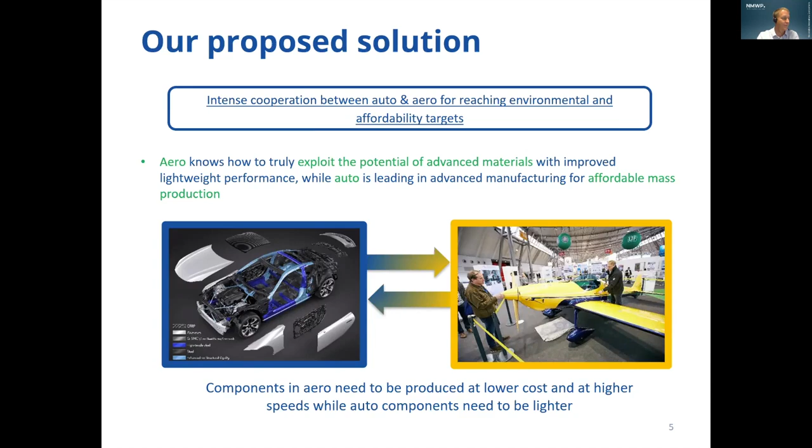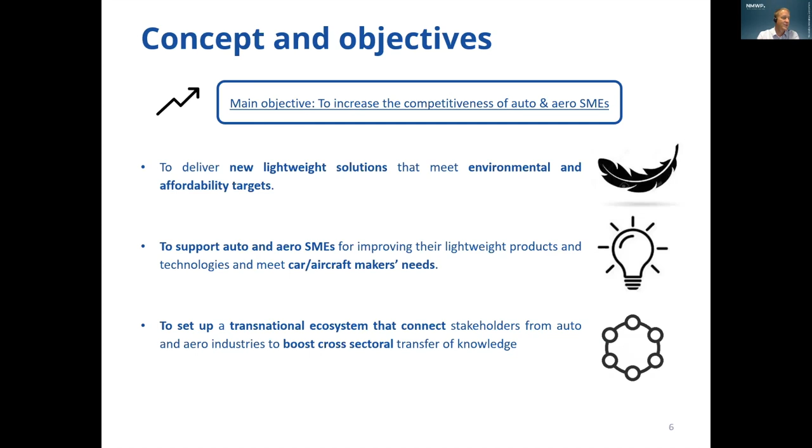Now, how would we like to do this? First of all, we have this challenge-driven competition. So we have international enterprises who provided challenge-driven competitions to us, thematic challenges proposed by end users and large suppliers from automotive and aerospace sectors. And now the small and medium enterprises can apply with an innovative solution.

The next activity is our field labs and trainings. So we provide the possibility to present the solutions to these challenges in a competitive approach. And specialized field labs are set up to support the technical development of the winning solutions. So there will be a jury which will award the solutions provided.

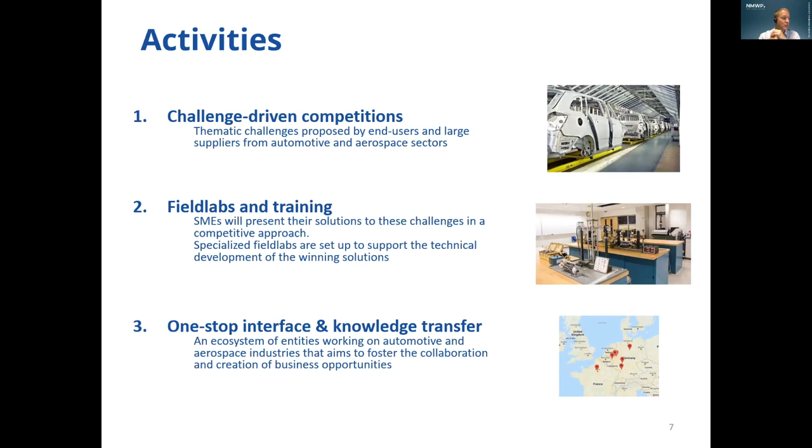And then next, we will have a one-stop interface and knowledge transfer, which will be done online in a tool provided by us, NMWP. So I think this is RIGHTWEIGHT in a nutshell. So we have two industries very dependent on lightweight, which should benefit from each other from the solutions they developed.

And I think before we come to the challenges, we would like to introduce the KIT on the one hand and NMWP.NRW on the other hand. So now I would like to hand over to the presentation of Markus Bardinger, who will present the KIT and give a short overview about the state of the art of lightweight constructions.

Is that right? I think so. Yes, it is. Thank you, Henrik. Okay, perfect.

Very good. So yes, I'm also a part of the RIGHTWEIGHT consortium. I also initiated parts of the project back when we first met in Brussels almost 2 years ago, I think. And now I want to start with a short presentation on the KIT, especially on the IPEK. So this is my institute where I'm working.

So my name is Bardinger, as Henrik already introduced me, and I'm chief engineer here at the IPEK, and I'm responsible for the CAE optimization group as well as for the development methods and management group. So I'm trying to share my screen, should be possible, I think.

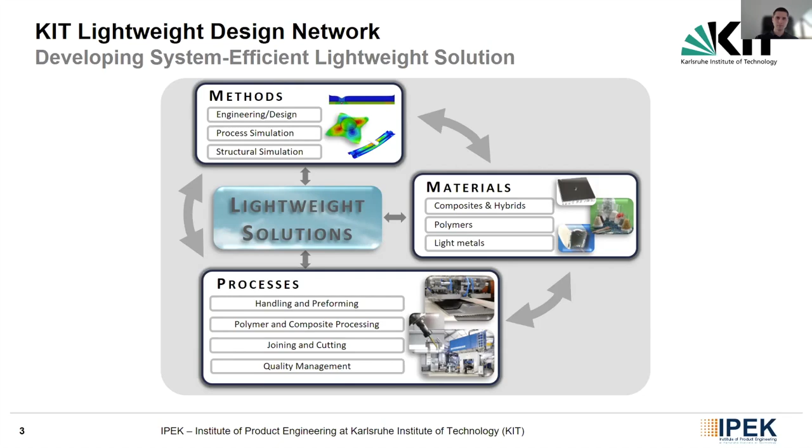So, but why is lightweight design still today, or especially today, that important? I brought some numbers here. I updated them this morning again, looking into the numbers from 2020.

2021 is not available yet, but I think it's pretty impressive that over the last 60 years, we doubled the mass of our vehicles, and we also increased the power of our vehicles by a factor of 4.

I think looking at the higher mass shows us that it is necessary to be more efficient, even in the future, and that we have to find new lightweight design solutions, especially for battery-driven vehicles like BEVs or plug-in hybrid vehicles.

And we need to find solutions for the higher masses of our batteries that we have to carry around with us in our vehicles today.

So I think an important part of this development is also caused by the fact that we need to include batteries in our vehicles today.

So those are, of course, numbers from the automotive industry, but this also applies in many cases to the aeronautic industries. Of course, today we are thinking about having batteries in airplanes as well.

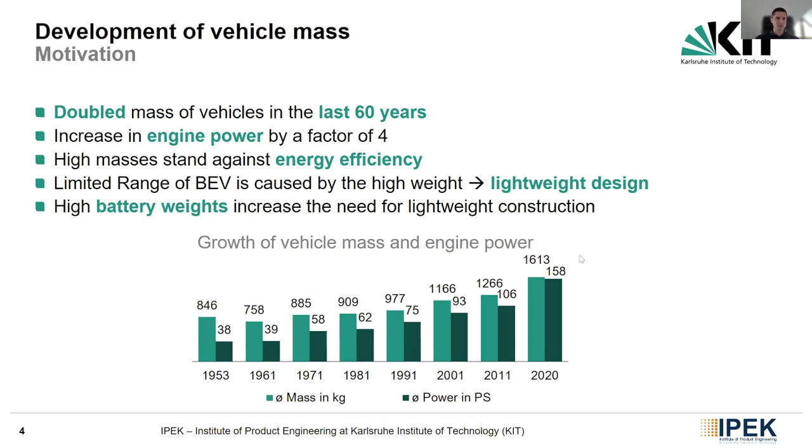We need to find solutions to minimize the weight of our aircraft as well, and this, I think, is the same reason for lightweight design approaches that we can see all over.

So here's just one example of the projects we worked on in the past. We need new structural materials, as have been included in battery electric vehicles like the i8 from BMW, but also the i3, for example.

But this is also only possible if you include new construction and design methods, so that you have engineers who are able to apply those new materials to their specific use cases.

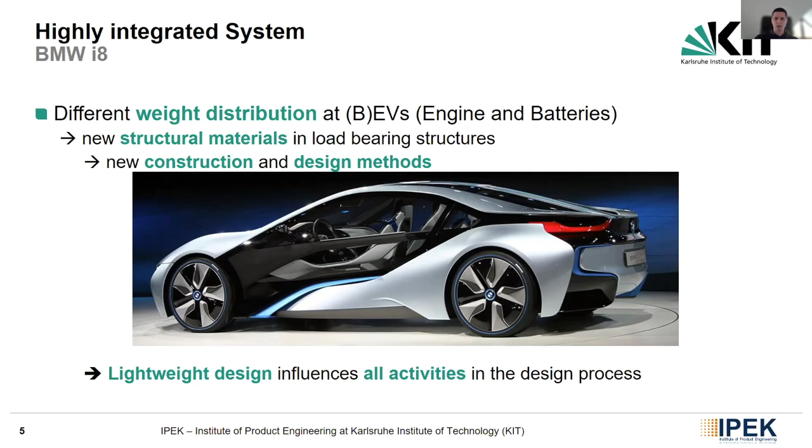Another example we worked on, which I want to use to emphasize the different lightweight strategies that are well known out there to develop new vehicle generations.

So I'm talking about product generations in my talk, my short presentation. That means we are developing our products not from scratch, not based on a blank sheet of paper.

So we always start development based on a reference, always based on previous product generations, based on predecessor systems.

And of course, when we have the challenge to reduce the vehicle weight, we can change material. We can, of course, change the connections between our different components and parts. We also can optimize the shape, the embodiment of different components.

For example, to optimize via topology optimization.

We can also go into more complicated ideas and conceptual parts, like integrating functions to reduce the amount of components. Or, if it's possible, we can also think about the requirements - is it possible to reduce comfort?

But of course, nowadays, most product development processes aim for more comfort and more safety. So reducing requirements normally isn't possible within the projects we see.

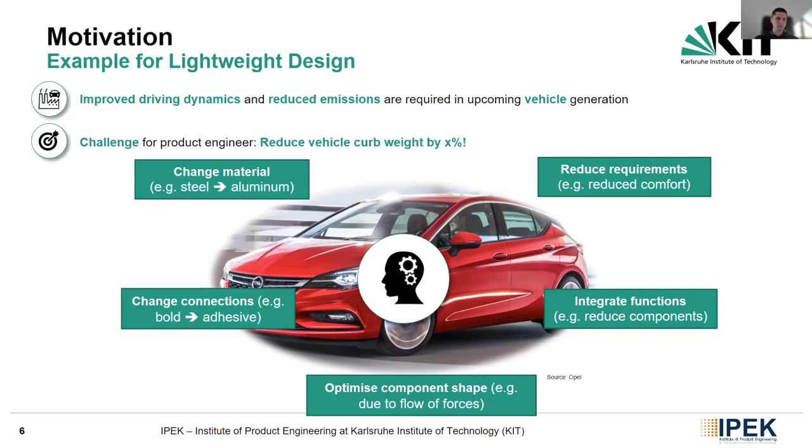So here are the different lightweight design strategies. I want to link this with the different lightweight strategies: material, manufacturing, form, system, and conditional lightweight design strategy, which are more or less commonly known through literature. There are some other approaches, but most of us will agree those are the possibilities we have in lightweight design.

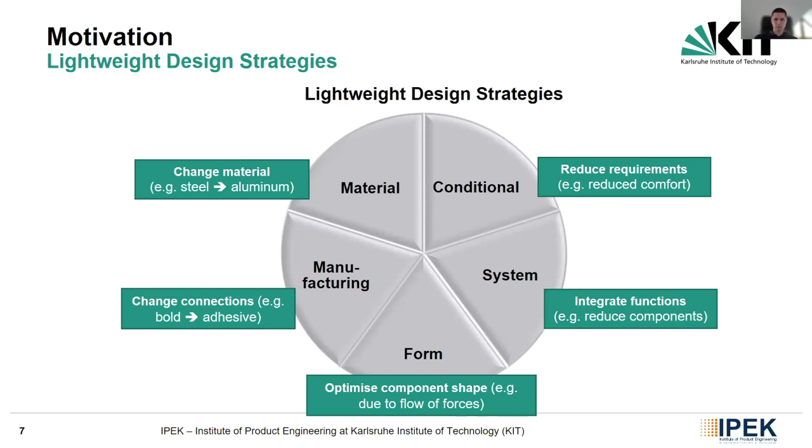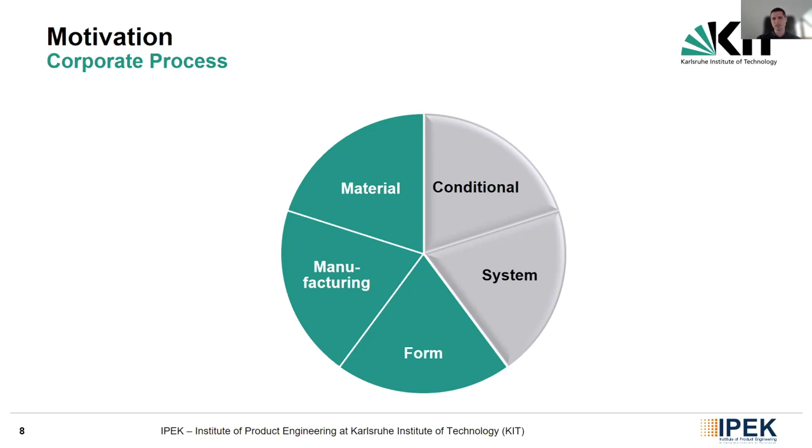So here at IPEK, we focus on three lightweight design strategies: material, manufacturing, and form lightweight design. This is also how many corporates work, structured in different subsystems, and this is a typical task we fulfill here at IPEK, at KIT. We try to focus on a specific subsystem, for example a control arm in a suspension of a vehicle or a specific part of the chassis, and then we try to get as much out of it as possible.

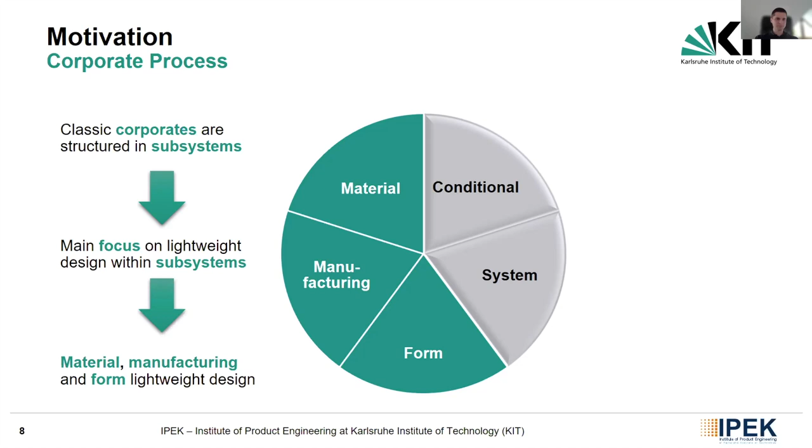So we are trying to find the right material for the function, and we try to find the right design for it. But this, of course, focuses only on material, manufacturing, and form lightweight design. So what are specific approaches we are using?

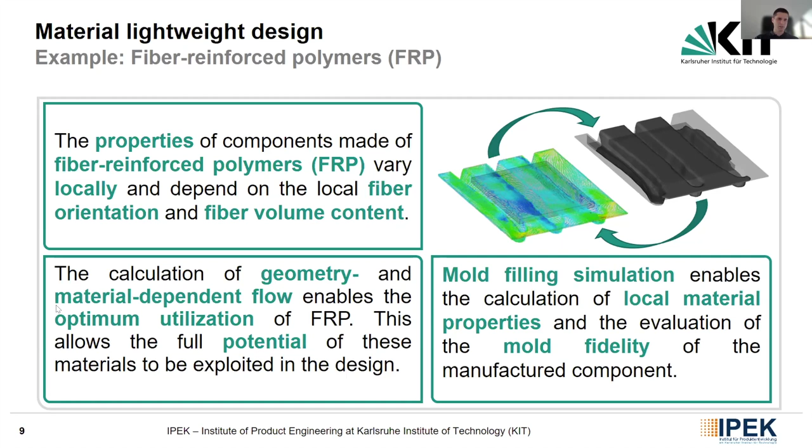We are using long fibers, for example carbon fibers or glass fibers here, and we are able to predict the material behavior within the optimization process. This allows us to optimally use this material behavior for our dedicated function and to transfer our forces through our part later.

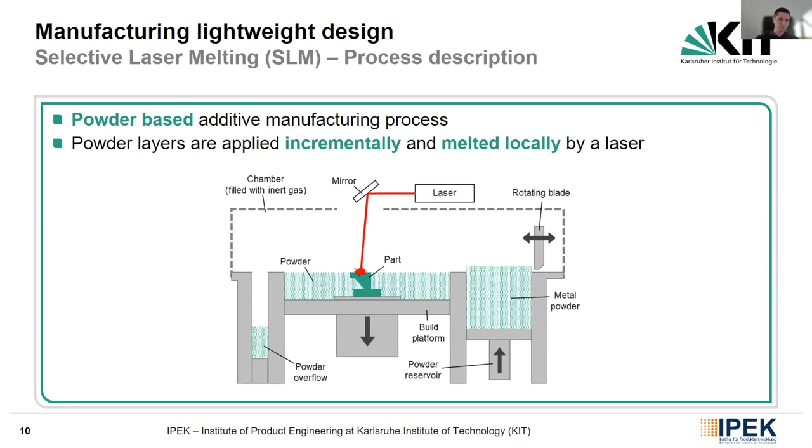Another example of how we can include different manufacturing processes into our design process is shown for the selective laser melting process. I think most of you know the 3D printing process shown here; I just brought it to give you a short impulse. Of course, this material is printed within layers, and those layers later have an influence on the material behavior we can see.

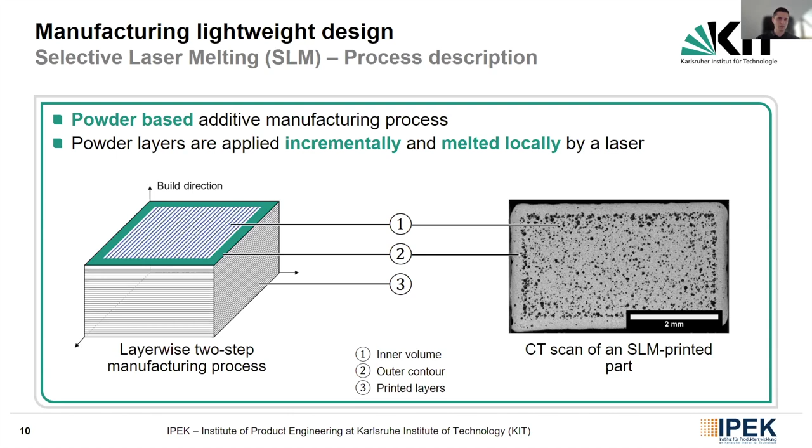It's a CT scan of an SLM printed part here, and there we decided to have three different zones: the inner volume, the outer contour, and the different printed layers, shown on the left-hand side. We measure the material behavior here together with a partner institute at KIT. Then we include this material behavior, which is laid out over our different structural parts, within a topology optimization. This is shown here.

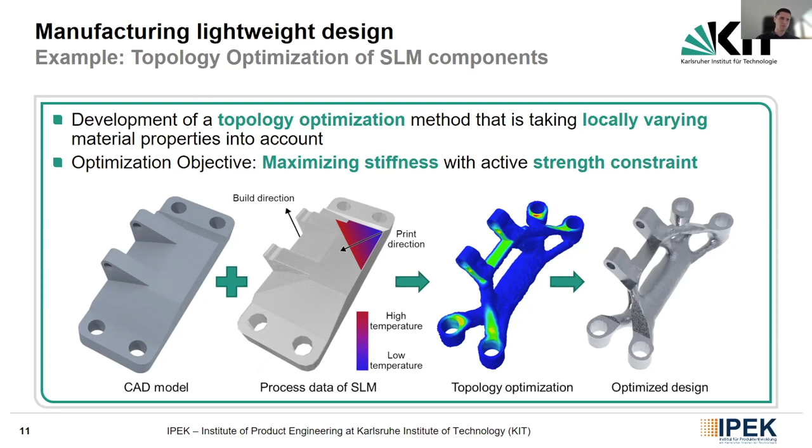Another approach we're following here at IPEK is the optimization of thin-walled structures. We introduce beads to the structures to increase the stiffness. And there, if you think about using fiber reinforced polymers, or even just steel, there's an influence from the manufacturing process, and this can also be included into the bead optimization process, which is currently being done within, I think, two or three projects here at IPEK.

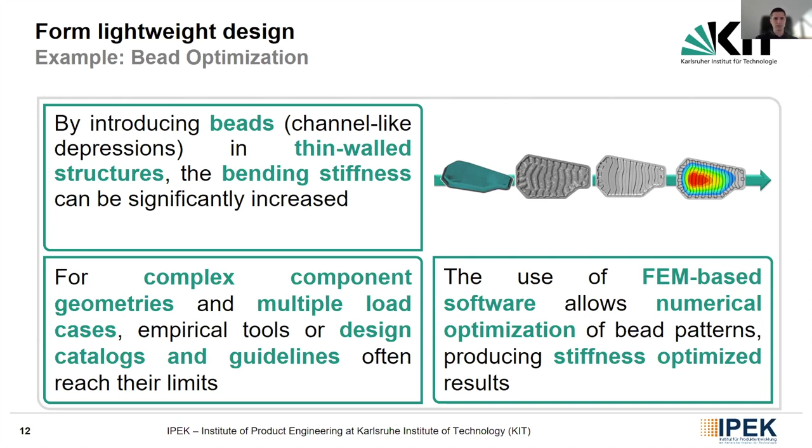As I mentioned, those 3 different lightweight design strategies are necessary and important, but there's also more, I think, and this more is to combine it on a cross subsystem approach so that we can include all the lightweight potential within projects, which overcomes those boundaries I mentioned before, so that we can find the overall system optimum and not just local optima as in the approaches shown before. This is called concept lightweight design here at the IPEK.

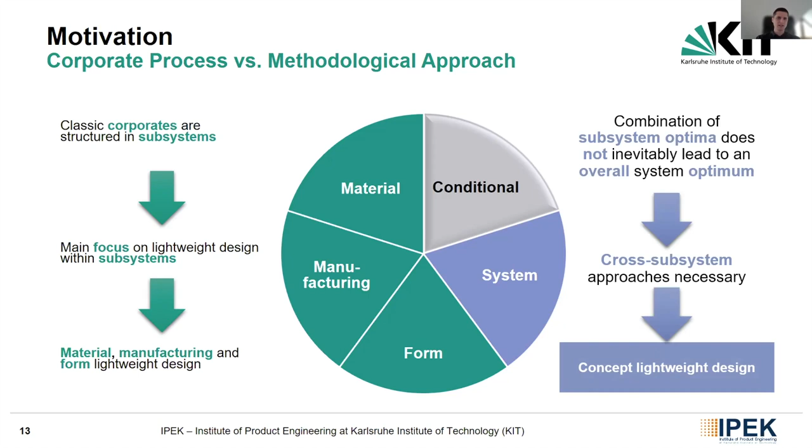What you need to understand, I think, is we start with a product generation we already have. Then we analyze the different functions of this product generation, and also we analyze our efforts. So we include the mass, of course, in lightweight design of our product, but we are also analyzing its costs and its CO2 emissions within those projects. This enables us to calculate the effort of one function, and then we can decide where lightweight design is necessary and useful, and where it's also useful from an environmental point of view. Then we go through this complete process and end with a new product generation. That's just in short what we do here.

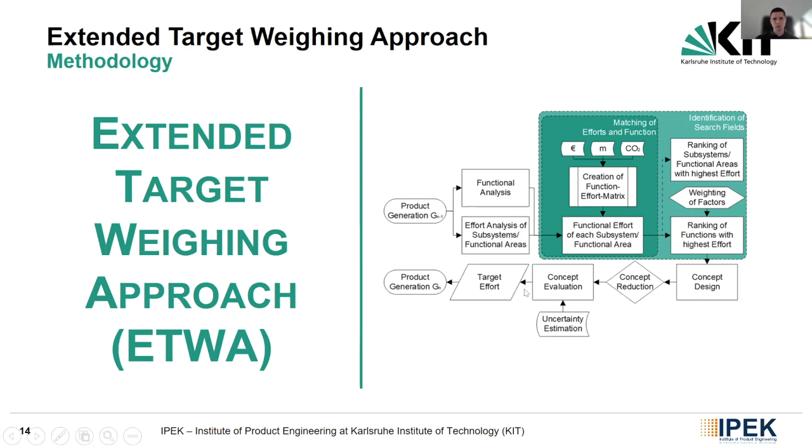I brought 2 examples. One of those examples is the high voltage battery we optimized a couple of years ago. There we had to reduce the weight of this battery by 20%. Of course, we did it not just alone at our institute, we worked together in a bigger consortium. But what you can see is that already in a really early phase of the product development process, here in the concept phase, we can compare different concept solutions and decide, based on weight and costs in this example, which is the best solution in the end.

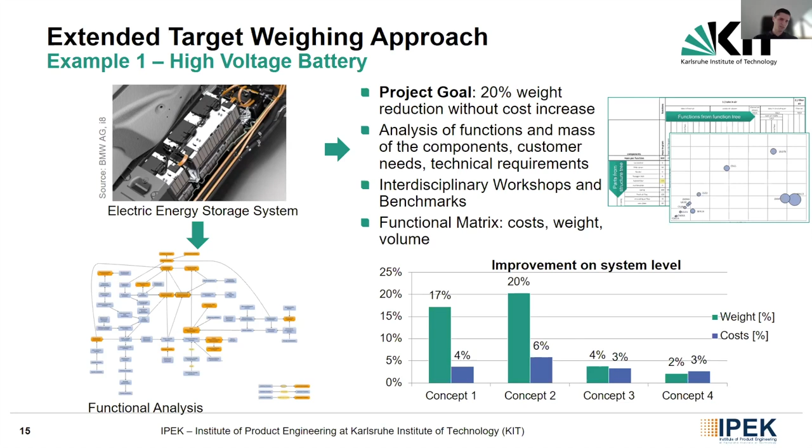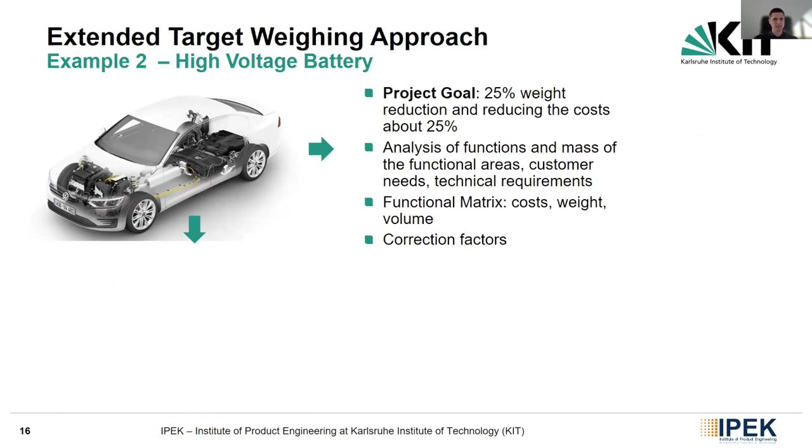The same had been done here for this high voltage battery, so it's a different car manufacturer, as you had seen before. There we had been even more ambitious at this time, so we tried to reduce it by 25% in this project. This has been done completely by IPEK. I think around 6 or 7 years ago, this was one of my earliest projects here at KIT.

And here we had also a part of a battery, just the housing. There we developed an approach to analyze different functional areas with this method. We developed different correction factors, and also here we came up with different possible solutions. So we started first with just conceptual drawings made by hand, then had different solutions more detailed in CAD, and could decide what is possible towards the mass we need to reduce here.

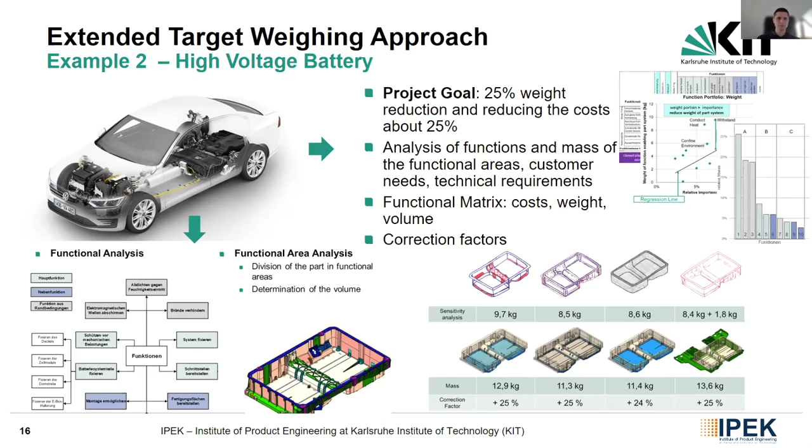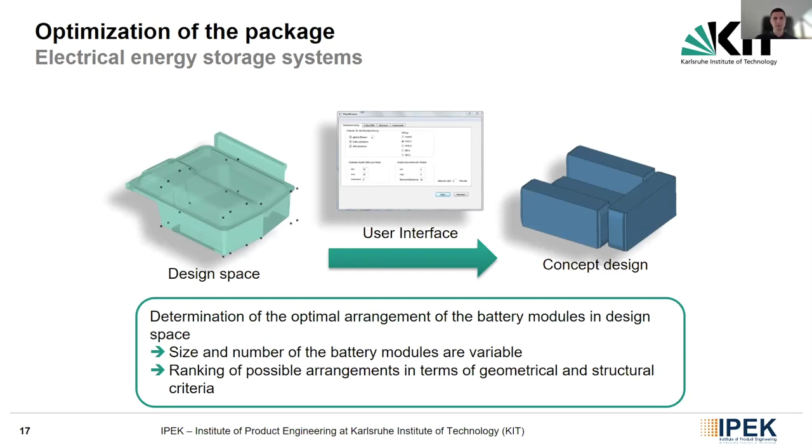So then we had further projects in electrical energy storage systems where we tried to find new solutions based on combining different methods, like for example topology optimization together with a packaging algorithm that had been developed. We started here with the initial design phase and developed a first concept design, and there we could have an easy ranking of different concept solutions, so where to apply how many cells, for example, in this energy storage system. We also could automatically evaluate how the later mass and the structural behavior of this component will be.

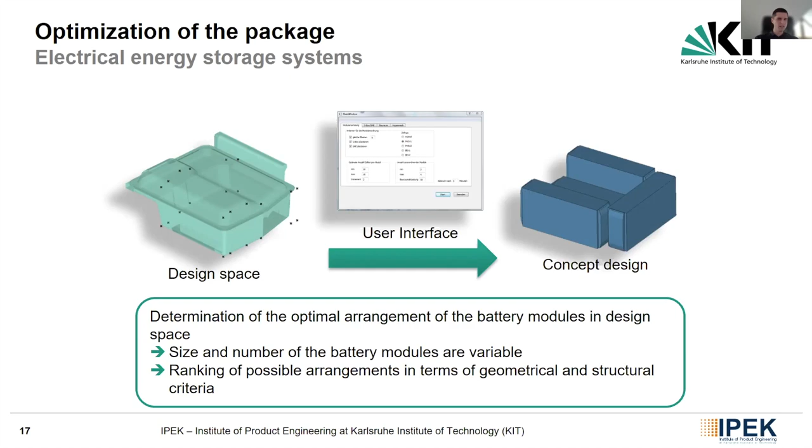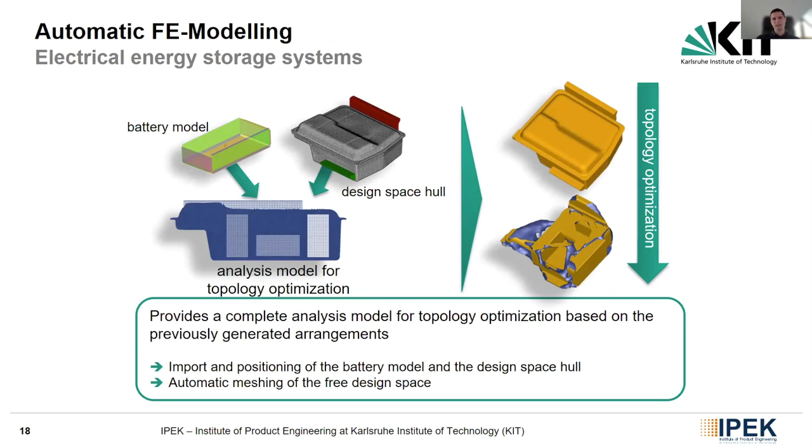So this had been done, as you can see here, by topology optimization, which had been completely optimized. We included our battery model, our design space, into a complete analysis model. And then we had in the end different suggestions of our structure and could compare which is in aspect of lightweight design more suitable than others. Here are some more exemplary solutions to that.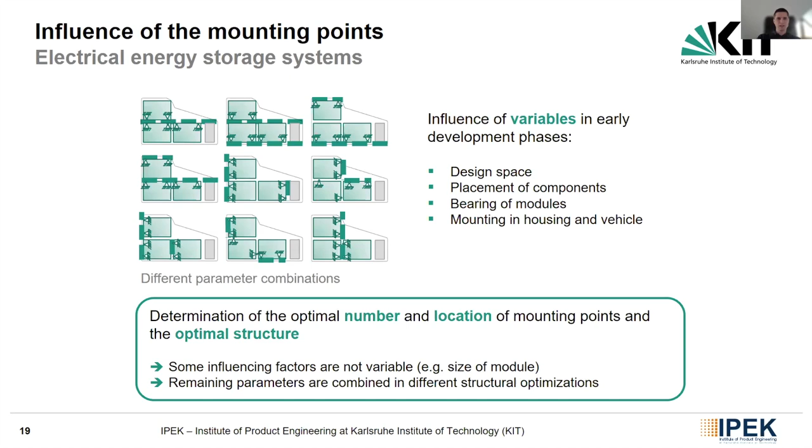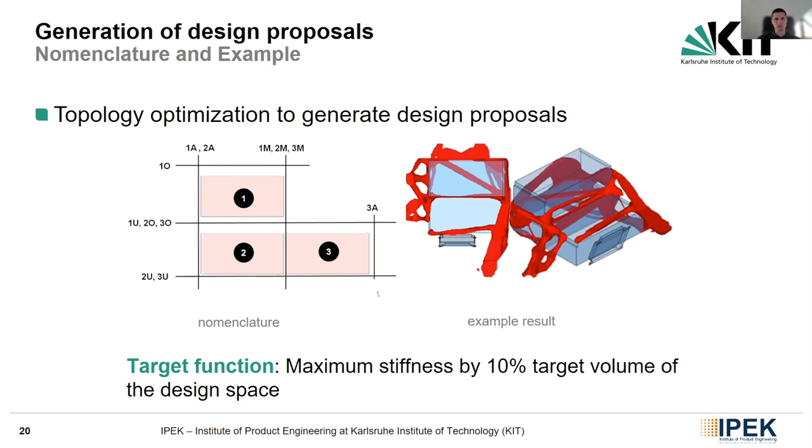To not exceed my time too much, I will leave it here and just motivate for using the methodologies. You know, for example, to have a design approach, then go into CAD, then go into calculations or FEM models, and try to find your best solution. It's not always the best process. Sometimes it makes sense to introduce methods and tools like topology optimization to really early parts in the product development process and try to find best concepts and compare different concepts as shown here.

So to conclude my short introduction and how we see lightweight design, I want to motivate that it's important to think in product generations. So you have to use the information you have from predecessor systems. You have to find a way to manage your knowledge in a sufficient way to make your knowledge applicable to new solutions.

This can be done by systematic views, by integrating material, computational methods, and modern processes. This leads in the end to the chance, at least, to exploit the full existing lightweight potential by a systematic approach, a system-oriented lightweight design approach. So thank you very much.

I hope I didn't exceed my time too much, and I'm looking forward to the really interesting challenges, and first of all to the introduction of the NMWP, I think by you, Matthias, right?

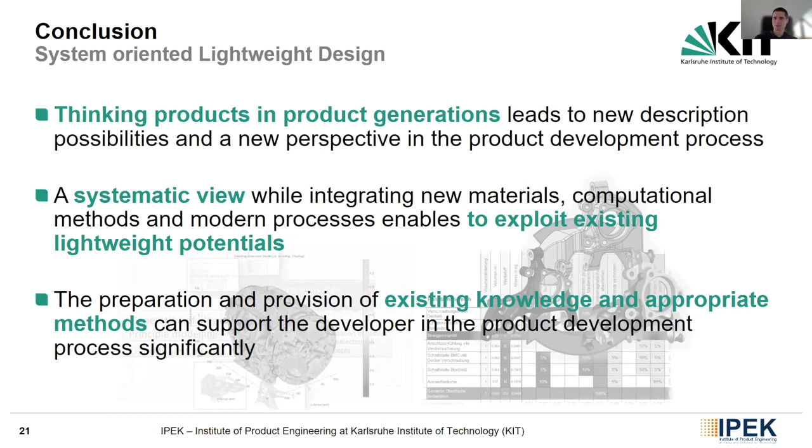No, it's by me. So thank you very much. Everything's fine. Thank you very much for your presentation.

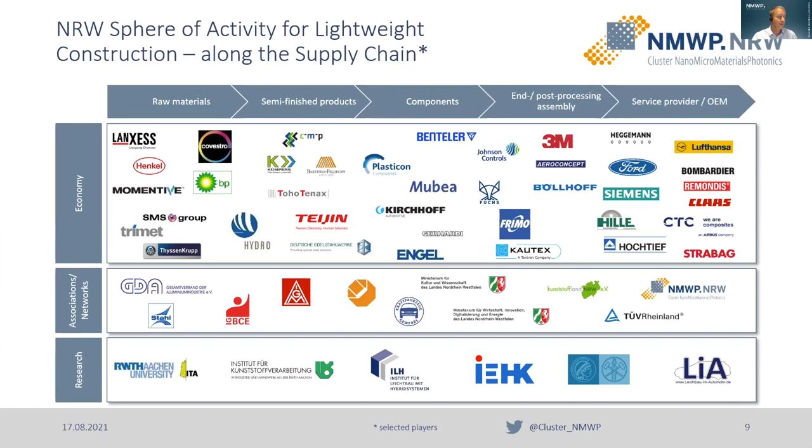There are several networks, and we have very strong expertise in research in North Rhine-Westphalia. RWTH Aachen, I think it's one of the bigger universities. We have also smaller universities and institutes, a lot of Fraunhofers which are involved in lightweight construction.

So how can we be of service for you? You can benefit from our services. We have strategic consulting and support for setting up technology-driven corporations and businesses with partners in North Rhine-Westphalia. We have a strong network, so we can give advice on this.

Also, we have guidance. We have an overview of North Rhine-Westphalia's economic and research landscape, so we can help you with this as well. Advice on specific NMWP related topics and possibility for grants also. And we have also a certain link to the policy community.

So this is NMWP in a nutshell. And Markus said in his presentation, lightweight influences all sectors of engineering and design. I think I can conclude with the key enabling technologies: nano, micro, materials, photonics, and also quantum technologies, which have a strong influence on every industry and also on every part of lightweight constructions. And with this, I would like to end, because lightweight has already been presented.

And then I would go back to the last presentation, and then we can go on with the challenges we have. So give me one second, please. Start the presentation. Okay, so now I think we can go on. Matthias, do you want to start with the challenges we would introduce, or who wants to start? Yes, I would go through the first set and then hand over to our partners. Okay, so perfect, then the floor is yours.

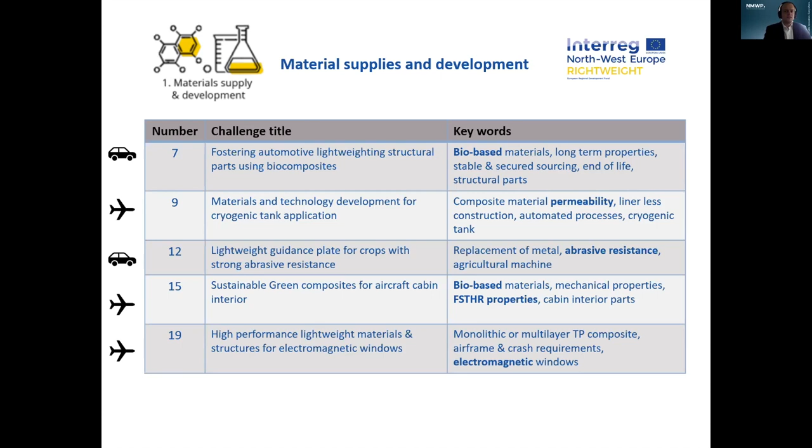Yes, exactly, that would be challenge number 9, which is cryogenic material applications. As we know, more and more alternative fuel usage is promoted in aerospace, and it's already used in space applications. There's a need for new materials for cryogenic tanks. The scope of the challenge is that there will be a resin system necessary with matching thermoset, thermoplastics, and definitely high temperature and chemical stability. Here on the right, maybe some recognize it — this bluish color is liquid oxygen. That's pretty cold and also pretty reactive, so it has some high obstacles that need to be overcome for the material.

The current production technologies are filament winding, automated fiber placement, automatic tape laying, or laser-assisted tape laying. All of them have some benefits and some drawbacks. For example, the two blocks shown in the middle: this resin either has high permeability, which is not so beneficial for storing the slowly evaporating fuel material inside, while low permeability is much better, also for cryogenic applications, because the temperature change will decrease if it's low permeability. So the challenge objective is finding the best compromise between cost saving, mass saving, and performance — it should be lightweight, but it needs to really work as a good cryogenic tank material. It would be nice to develop a breakthrough technology for cryogenic tank applications. The scope of this challenge currently would be just the demonstration of material and technology maturity on a small scale prototype, so that in later steps, large scale application can be done.

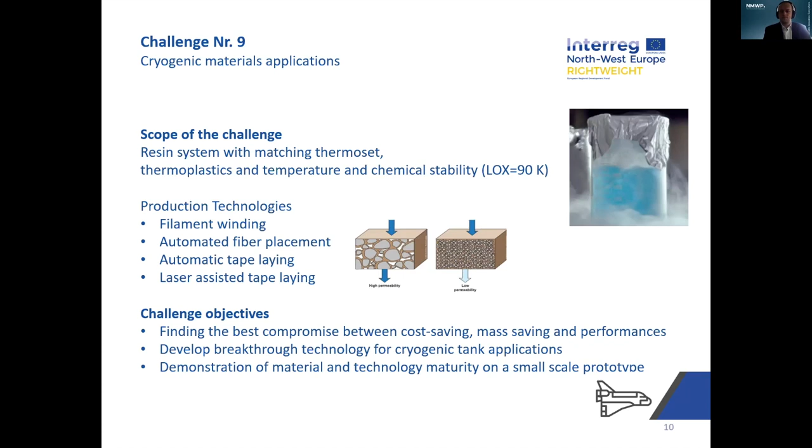Then the next set of challenge topics — next slide please — is characterization and modeling. As we saw in the IPEK presentation already, modeling before building the part is very important, and can always improve the lightweight properties of the material and the component.

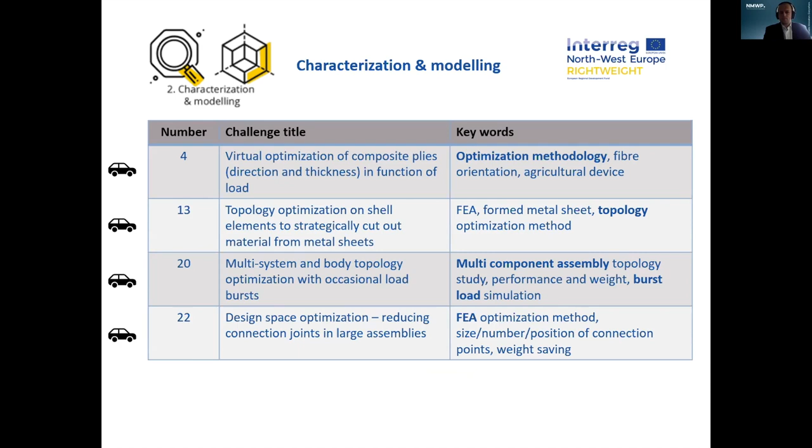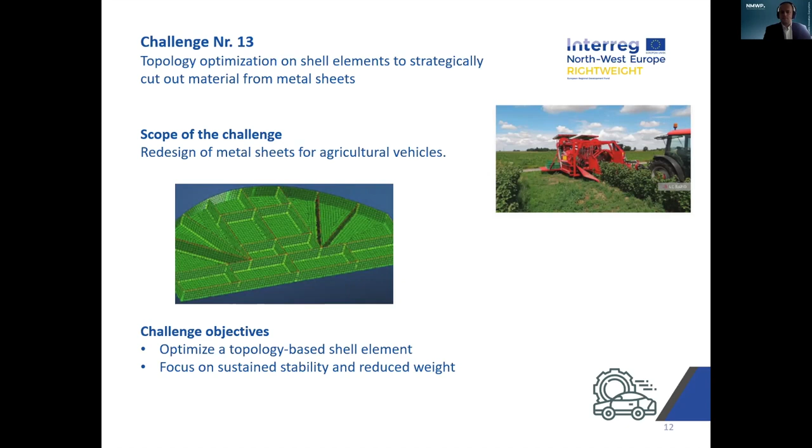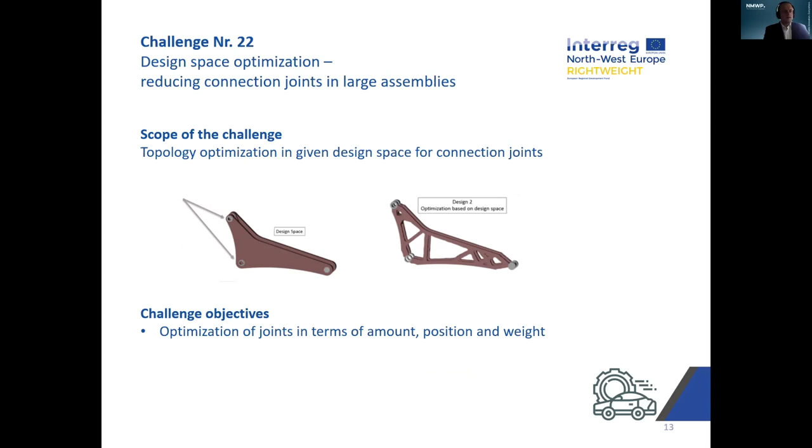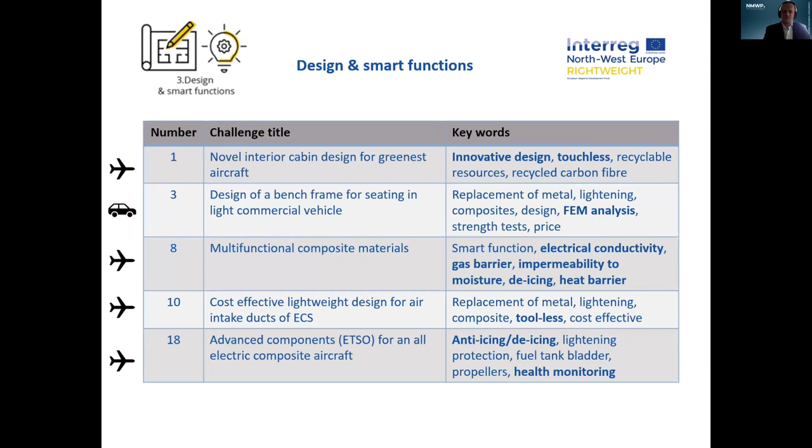Yes, the third topic of challenges is about design and smart functions. It's more and more common that the material is not just a simple material, but has more elevated functions. On the next slide, as people who are familiar with aerospace know, there is the European Technical Standard Order, ETSO, so components that will be developed need to be certified.

And here the target is to develop an all-electric composite aircraft, where, in open discussion with the challenge owner, these advanced components shall be designed and cost-effective solutions shall be proposed. So there are different possible objectives here. Not all will be done in one challenge, but it's open to discussion.

If you apply, you can get in contact with the challenge owner and do something like an effective aircraft design thanks to advanced composites. You can do some system integration, develop a health monitoring system for the composite and the overall system. And finally, that should lead to the transition of an all-electric aircraft that is newly designed and highly lightweight.

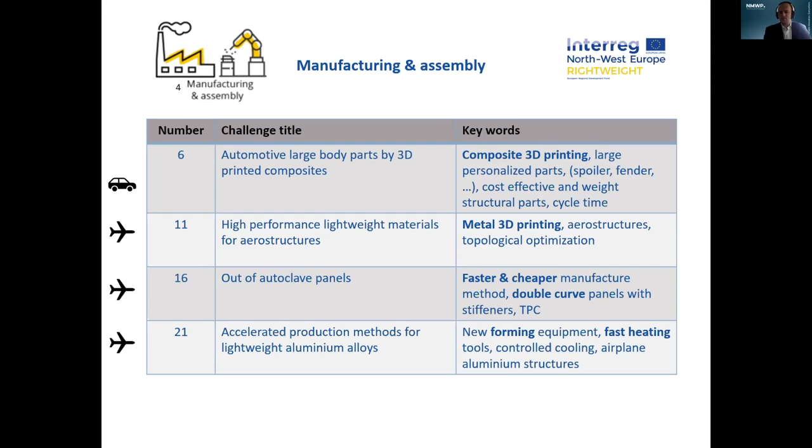On the next slide, yes, we are on topic number 4, manufacturing and assembly. As we had before, automotive has high-volume production, but aerospace is sometimes slower or more special in assembly and manufacturing. So they should learn from each other. And that's what we have on the next slide, which is challenge number 11, high performance lightweight materials for aerostructures.

So there are materials and building components that are already present or in use, but topology optimization is necessary. It is highly desired that interchangeability with existing parts is given. And the idea would be to either use newer composite materials instead of the currently used steel parts, and/or combine them with 3D metallic printing to allow even better topologies. So this is basically also the challenge objective: latest 3D printed metallic structures and a cooperation to finalize a technology partnership to then develop a sample or prototype.

The next challenge is out-of-autoclave panels. Autoclave is a technique that takes quite a lot of time, but gives very nice results. Nowadays, many thermoplastic composites are manufactured in autoclave to consolidate the properties. But autoclave takes a lot of time. So there is the state-of-the-art data here, and if somebody has a nice idea, the challenge objectives would be to find an affordable production method with a shorter cycle time, determine the manufacturing costs, and then produce one demonstrator that can be thoroughly tested afterwards.

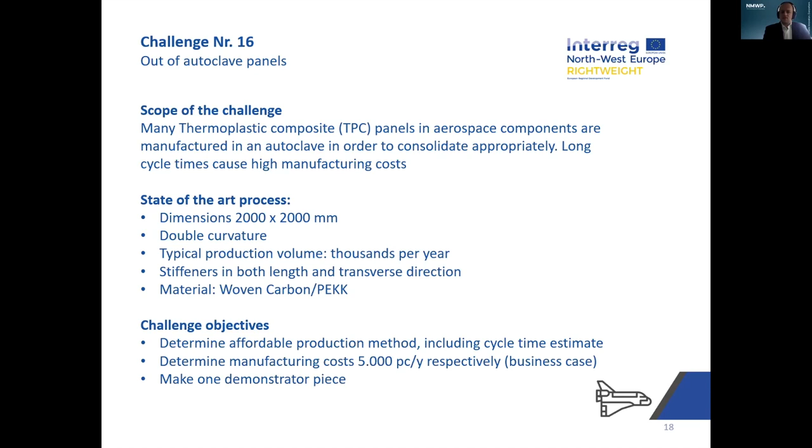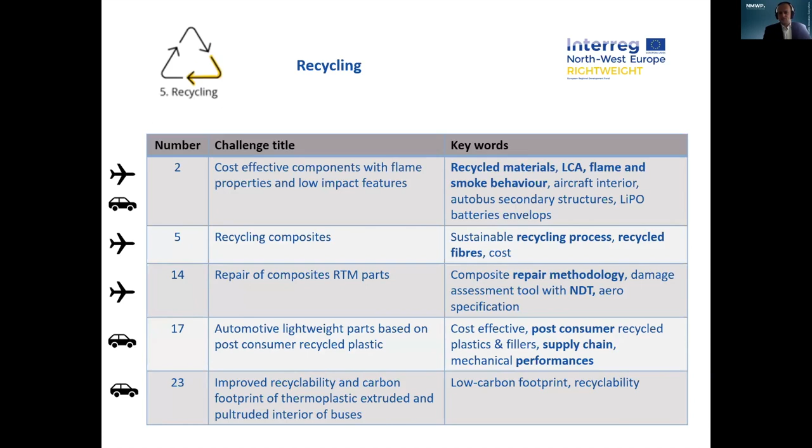The fifth topic is recycling, as it's not just about producing something lightweight from an unrecyclable or not so environmentally friendly material. Recycling becomes ever more important. And here we have on the next slide the repair of composite RTM parts. Most often a composite material, if damaged, has to be replaced completely because of the nature of the composite. But this is very costly and not cost efficient.

As everybody can imagine, there's the danger of damage through small objects, especially in aerospace. And it would be nice to find an in-field solution without the necessity to disassemble the plane, for example. This would extend the life cycle of the repaired part, but also of the whole system.

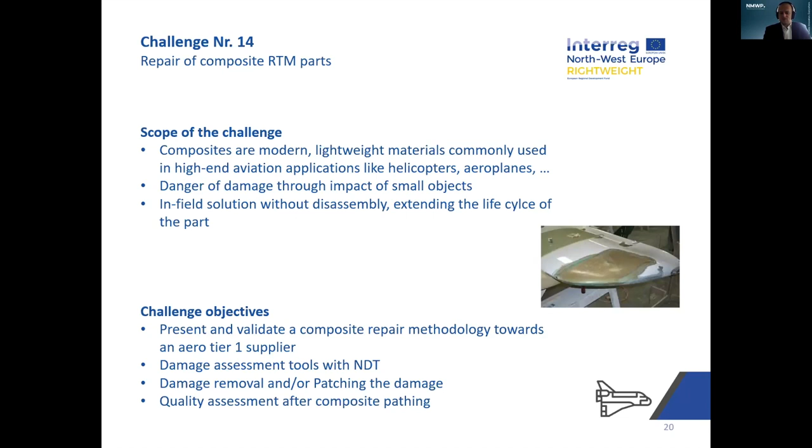Challenge applicants should present and validate a composite repair methodology towards an aero Tier 1 supplier. It would be necessary to present a damage assessment tool with non-destructive technologies, a damage removal or patching of damaged composite materials, and a methodology for quality assessment of the composite part.

Okay, yes, and I came here this morning by bus, so I'm pretty familiar with this one.

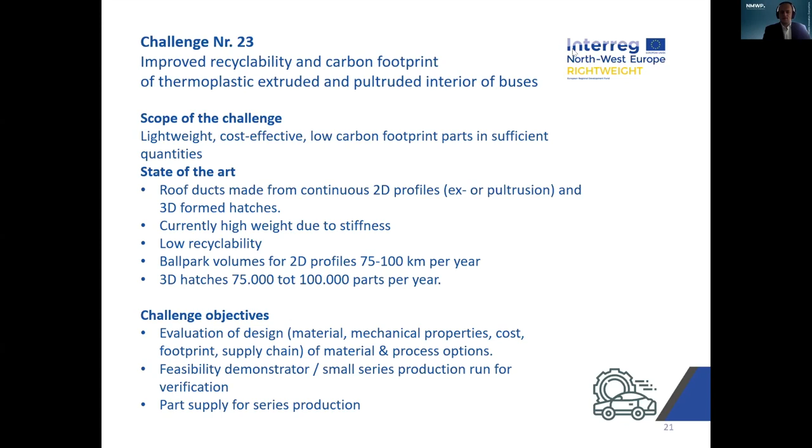Okay, so we will proceed with the next challenges. So we will not present it based on our different slides. We will start by also introducing to you our homepage of the RIGHTWEIGHT project. So this is the central site. You already had seen that there are different cross-cutting areas, which had been also introduced already by Matthias in his presentation. And what we are now going through are the different challenges here. So the cross-cutting areas will also be highlighted in the different challenges.

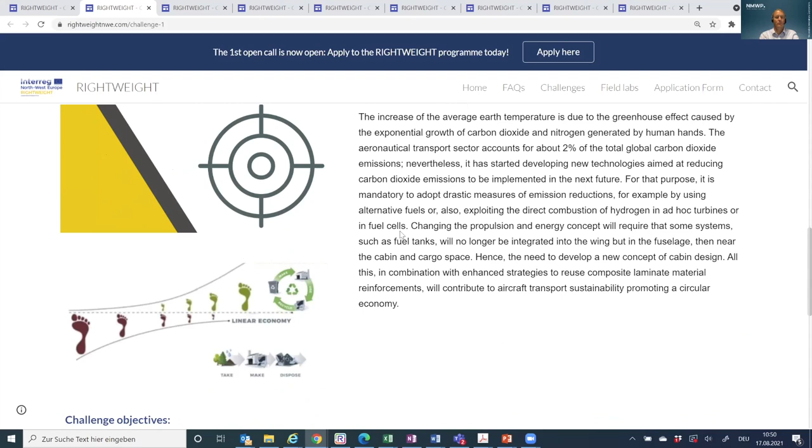So here is some more information about the scope. As I mentioned before, the challenge giver wants to go into a circular and green economy by also reducing the CO2 footprint of the aircraft and the aircraft design. So again, the challenge objectives here are to extend the usage of recyclable material, so that in the end parts are 70 up to 100% recyclable and made out of recyclable material. The fuel consumption within the overall weight reduction is between 8 and 12%, which should be decreased. And of course, the RC costs should be reduced by at least 5%.

Okay, that's it about challenge number 1. Then we go to challenge 2, which will be presented by my colleague, Patrick Haberkamp. Thank you for the introduction.

Yes, so the second challenge is on the topic of cost-effective components for aero and auto transportation, but with the small change that we need also the flame properties and low impact features. So as often used in today's aircraft or automotive sectors, also here the use of composite and polymeric materials is the central part of this challenge.

So additionally, we need to take into account the process reliability and also cost effectiveness, as well as the environmental aspect of the materials. Since in this challenge, the challenge owner likes to develop aircraft interior components as well as autobus secondary components, we also need to fulfill the requirements for structure, for the flame resistance, which is especially for aircraft interiors very important, as well as smoke behavior. We need to find new solutions for materials that can be applied here.

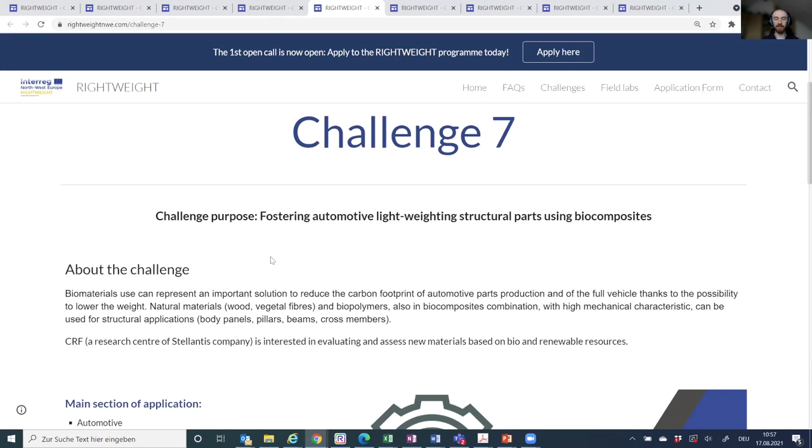And here the idea is to develop new material combinations, and the scope here is especially the development of this material and not the parts. So the scope is the use of biomaterials for the production of car parts that also need to be secure and stable. So we need to have materials that can be available in a large amount, since we still need to produce large amounts of cars.

The long-term properties of these components also need to be comparable to durable parts, for example, steel components, because it would not be really beneficial if we had components that need to be replaced after every year. So the long-term properties also need to be reliable.

And the last aspect is the guaranteed recyclability at the end of the life of the vehicle. So the challenge objective is the development of cost-effective biocomposites to reach the target of green content in automobiles up to 50%. The material also needs to be available in the supply chain, not just a rare component, and we need materials that fulfill the mechanical performances necessary in today's cars.

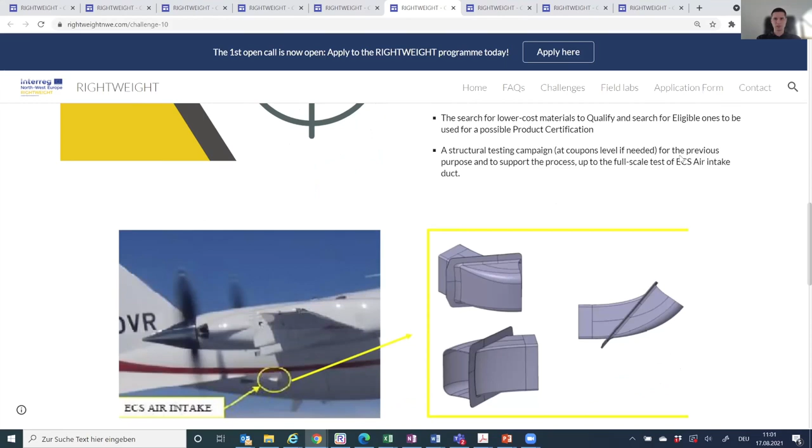So what is the scope? Processes that can be used for parts with complex shapes, as monolithic as possible. Failure is of course a big issue in this field of application. Then the search for lower cost material to qualify, and the search for eligible ones to be used for a possible product certification. And the structural testing campaign should also be provided when applying to this challenge.

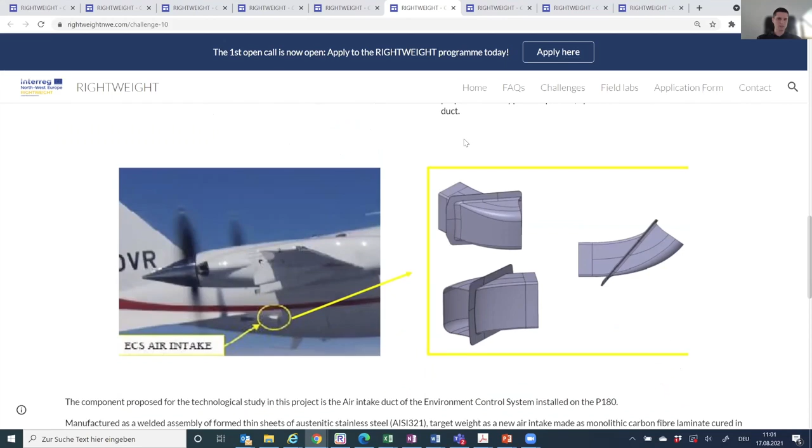So again, the challenge objective is to realize the demonstrator in alternative material and process for this air intake duct for the ECS, based on the reference shown before in this challenge. The solution should come up with a weight reduction of 50 to 60%, while reducing cost by 10 to 15%, and including a method to qualify a material and process to be able to apply it to similar items. Furthermore, you should be able to come up with a supply chain able to supply this new part for the aeronautical branch.

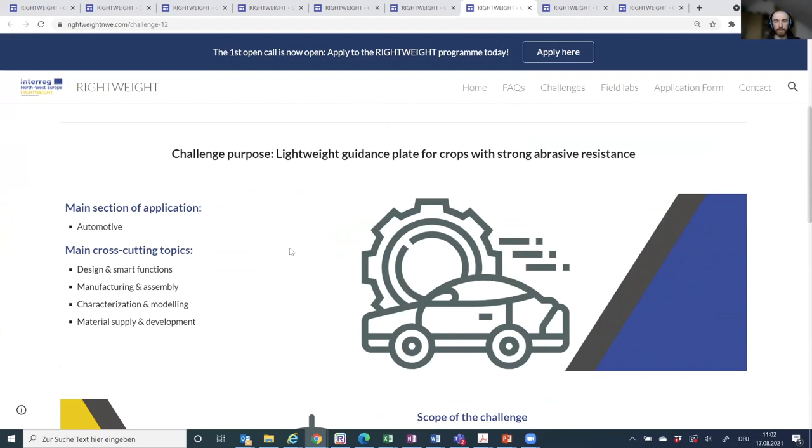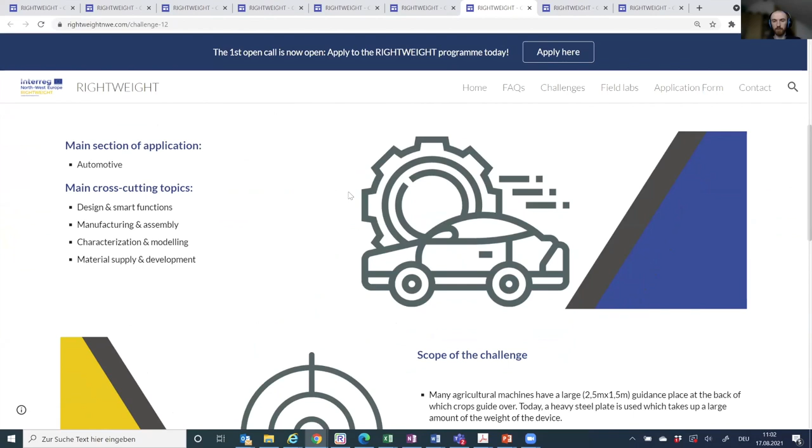Challenge number 12 is quite a specific challenge. It is on the guidance plate of agricultural machines, commonly used with dimensions of about 2.5 meters to 1.5 meters, used to guide crops over. And today, this plate is usually made out of steel, so it takes a large amount of weight of the device.

So the challenge objective here is to identify a lightweight material to decrease the weight of the component as well as the system itself in total. The clue of this challenge is that we have a special requirement since this plate is under an abrasive load from the crops gliding over it, so we need special requirements for the materials. And this is the scope of challenge number 12.

Okay, thank you, Patrick. So challenge number 24 now is also again in the field of buses. We had this one before. So here the idea is to develop a new crash floor structure for buses.

So the idea is to increase the safety of a city bus. The initial state is that most city buses are not that crash safe, especially for the driver. There are almost no regulations, as you might know from the automotive industry, on the well-known crash tests.

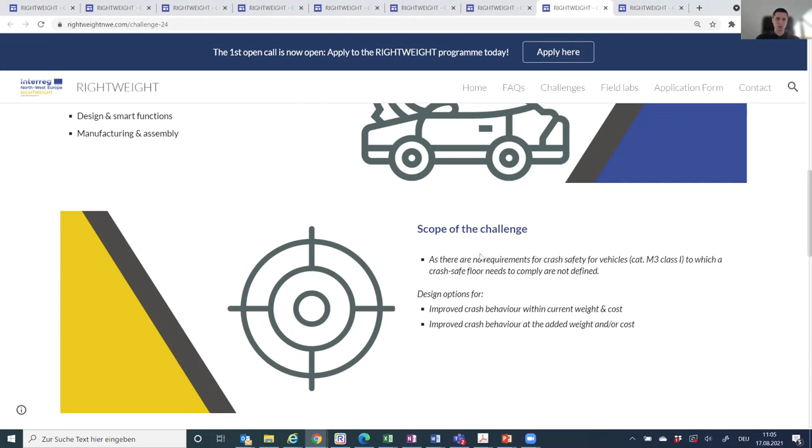And the idea is to improve the crash behavior of the bus while maintaining the current weight and cost of it. There should be no added weight and cost if possible.

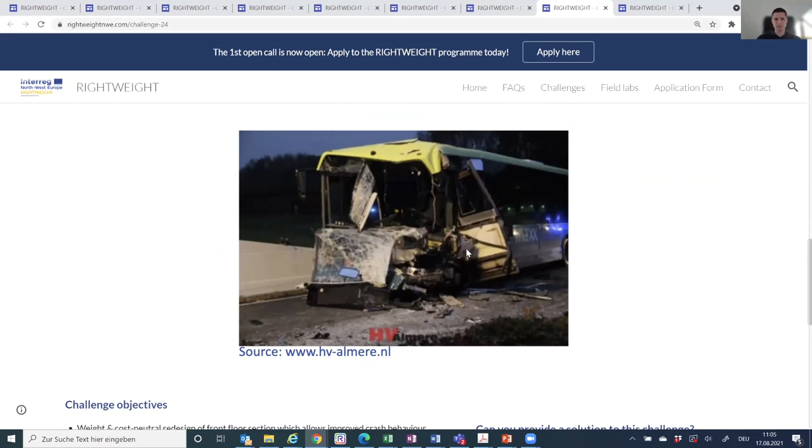You can see here one example of what happens, or how it can look like if it goes wrong in a crash. We are talking about the bus floor structure, which is responsible for the main stiffness of this vehicle, and new solutions should focus on this floor structure here.

So once again, the challenge objectives are weight and cost neutral redesign of the front floor section. So this is the part here you can see, which allows improving the crash behavior.

There should be new additional crash features designed to improve safety, and it's also important to have a modular design because it's manufactured modularly. Here different suppliers are involved in this process.

So then for our last challenge, again, Patrick. Yes, so the purpose of challenge number 25 is the development of innovative aluminum lightweight components for green road mobility.

So the challenge, titled Aluminize the World, is to enable sustainable and innovative solutions for the automotive industry. The target is to reduce CO2 emissions and support green mobility.

We want to develop innovative lightweight components on the base of aluminum, and also develop innovative cryogenic tanks for long-haul transport applications to store liquid hydrogen.

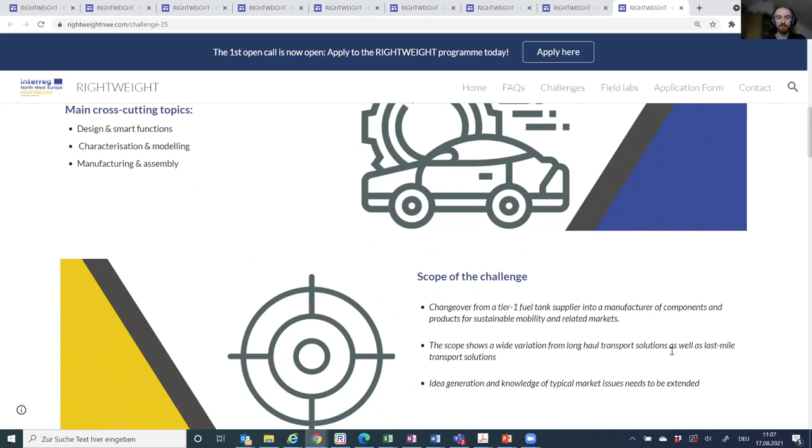As can be seen, the main section is the automotive section. The cross-cutting topics are design and smart functions, characterization and modeling, as well as manufacturing and assembly.

The scope of the challenge is to help the challenge owner change over from a tier 1 fuel tank supplier to a manufacturer of components in total for sustainable mobility.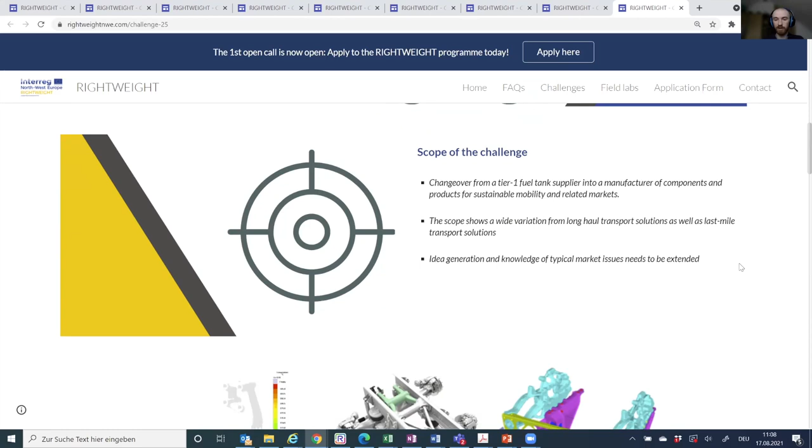And here the scope is pretty wide, so it can range from long-haul transportation solutions to last-mile transport solutions. Important here is idea generation and knowledge of typical market issues that need to be addressed for the challenge owner.

So here we see some examples of lightweight aluminum components. For example, here cab brackets, rear suspensions, or brackets for front underrun protection.

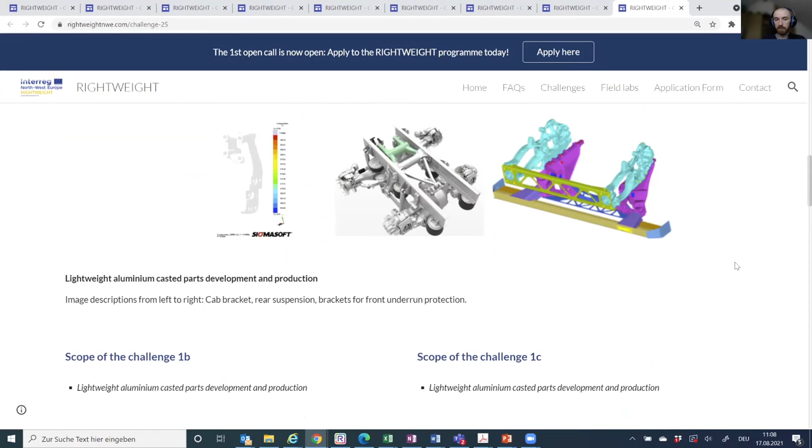If we go further, we see, for example, aluminum parts in a car underbody, or armrests for aircraft seats that are produced from aluminum, showing the possibilities available to develop new components and help the challenge owner with new ideas.

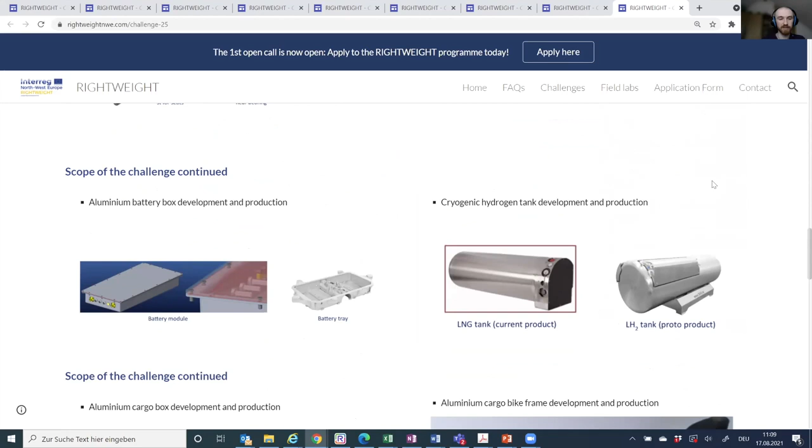Also here, a very current challenge is the use of aluminum for battery modules as a box, or the cryogenic hydrogen tank.

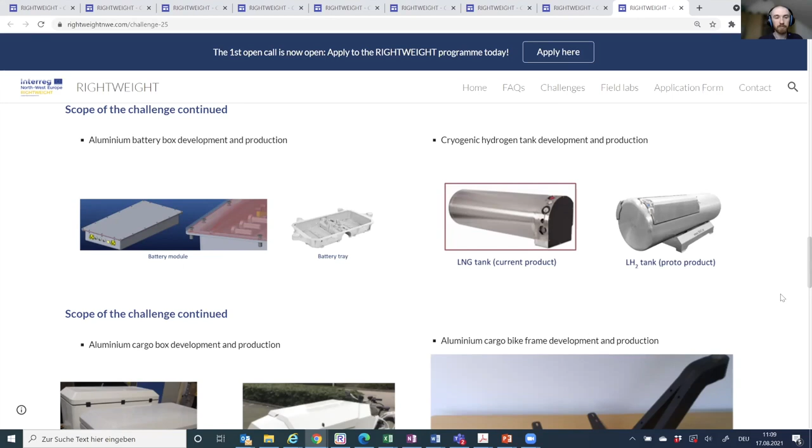So the challenge objectives are the production of aluminum battery boxes with a high range, from 1,000 to 200,000 parts per year, and the challenge owner would like to cooperate with a battery cell production company, as well as a sustainable mobility customer.

The second objective is the development of lightweight aluminum components with the production system of rheo-casting, also with a quite wide range, from 15,000 to 150,000 components per year.

Also, the third objective is to develop new ideas for aluminum components and establish a cooperation with sustainable mobility partners, providing the production processes and services. So that's it for challenge number 25.

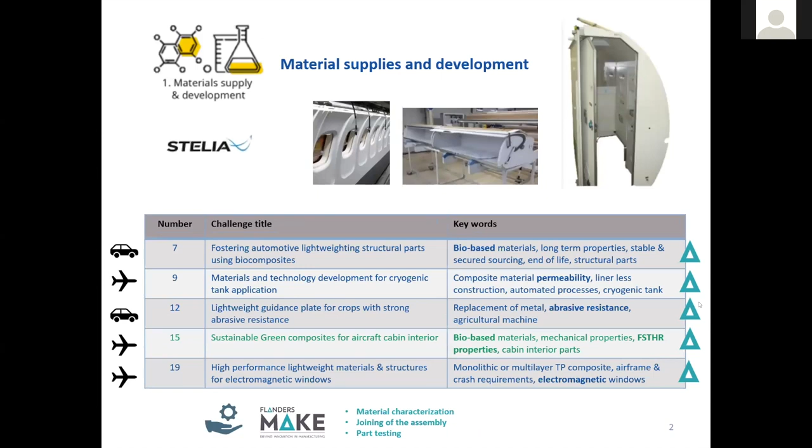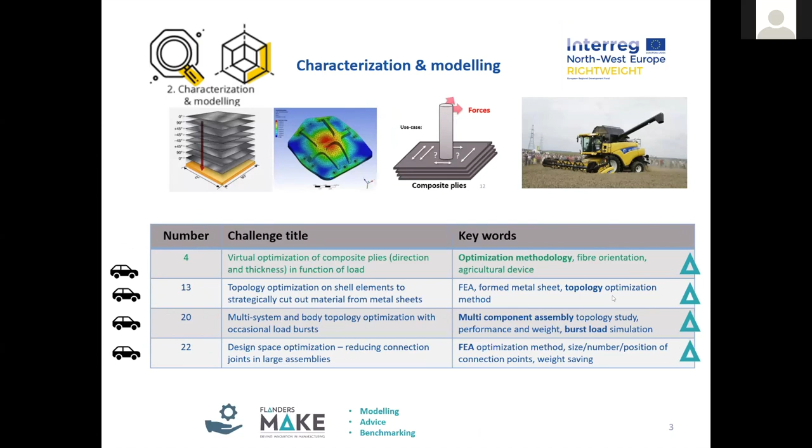As a reminder, biomaterials is something that is really interesting for us. We are also interested in topology optimization, but taking into account the composites and the fibers we are using in the composites. So it's about going deeper than just the shape of the parts, and how we can replace metallic parts with composites and lightweight solutions.

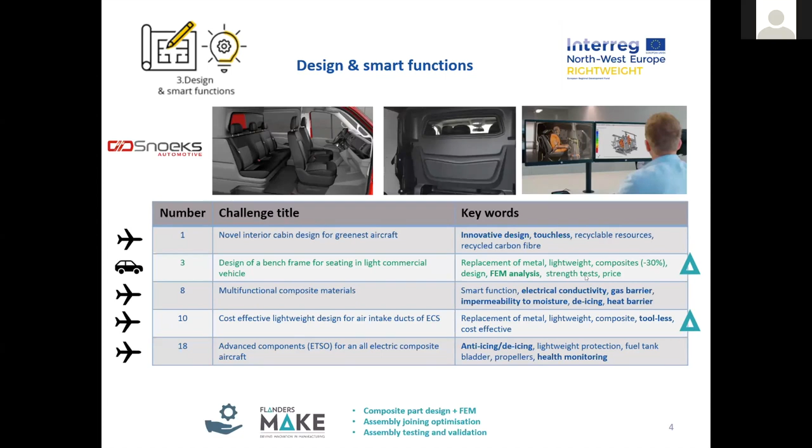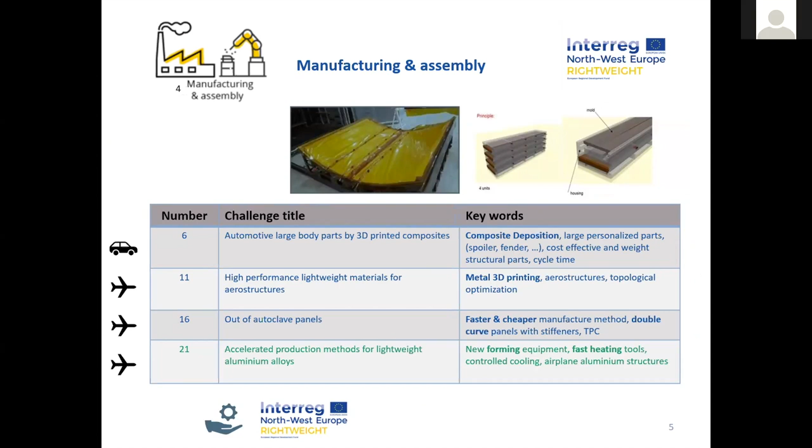Finally, to develop smart processes for forming lightweight solutions, like how we can work with aluminum in a better way, or even with composites. And finally, the recyclability of those products, because we don't gain a lot from lightweight products if they are not recycled. So those are the 5 challenges I want to present today. It's quite summarized, I didn't go into all the details, but I think it can give you an idea of where we want to go with the companies in Belgium.

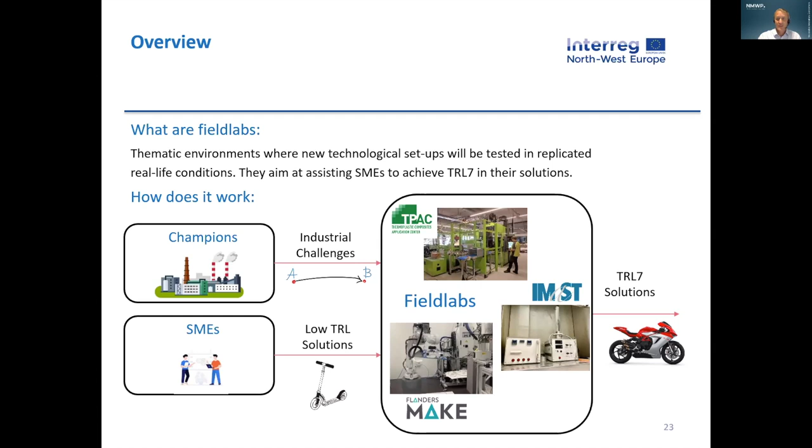If you apply for one of the challenges, it would be as follows. The challenges are presented by RIGHTWEIGHT champions, just in this case not by the champions themselves but by the partners. Then the application is open. As already said, we have two application phases. One is running, but we have a second call for challenges, and then we will have these national workshops like this one. As soon as the application phase is closed, we will evaluate the results, and then you can get a voucher scheme support.

And now, what happens next? There are two different types, two different ways, in the end three different ways. The best solutions provided are these trailblazer SMEs. They will get a voucher of over 45,000 euros, and there you can get services in these field labs concerning design, modeling, simulation, automation, testing, and so on, also IPR, business planning, and some advisors. These trailblazers should have an incubation up to TRL 7, and in the end hopefully they will have a route to market strategy and an investment plan.